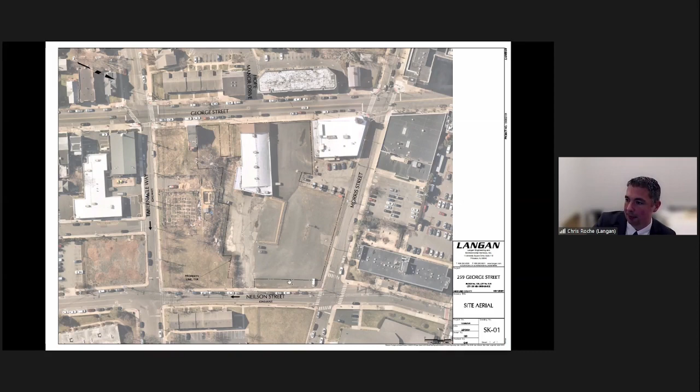So what the applicant is proposing to construct on the property is a 45-story mixed-use building, which will contain retail components, structured parking, as well as residential units above. The building will have a footprint of approximately 40,500 square feet. Within that, it will have approximately 25,000 square feet of retail, 501 parking stalls, and 800 residential units over top. As Mr. Kelso also alluded to, we will be constructing a 25-stall surface parking lot just to the north of the Abundant Life Church facility.

With the new development, our primary proposed site access point will be off of Neilson Street. That'll be a 24-foot wide drive. It'll provide access to the structured parking and will also provide access to our primary loading area. The architect will show you more detail about these spaces momentarily.

From an overall parking perspective, we'll be fully compliant with the redevelopment plan. Not only will we be providing the number of required parking stalls, we'll also be providing the required amount of electric vehicle parking stalls, as well as the required ADA parking stalls.

The loading, as I mentioned, will be primarily done off of our Neilson Street driveway. We're also proposing a small loading area on Morris Street where we anticipate smaller use loading vehicles, primarily to serve the retail spaces along Morris Street.

From a stormwater management perspective, we'll be fully compliant with the state stormwater management regulations by installing an underground detention system. Lastly, with the utilities, most of our utility services will be coming in off Neilson Street, with the exception of some of our water lines, which will be coming off George Street. The reason for that exception is because there is larger existing infrastructure within George Street.

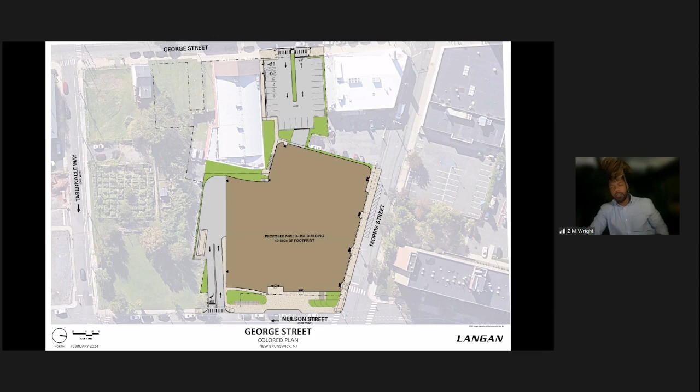The biggest thing we're doing, and it's a state requirement, not just us doing it, on all development projects, is we're increasing impervious coverage compared to existing conditions. You're required to install detention measures to reduce the peak flow significantly compared to existing conditions leaving your site. Without getting into too much technical detail, for the 2, 10, and 100-year storm events, we take what's running off the site now, and we're required to reduce that by 50, 25, and 20% for those storm events. So when this building is constructed, the peak flow leaving our site and going to the downstream systems will be significantly less than it is today.

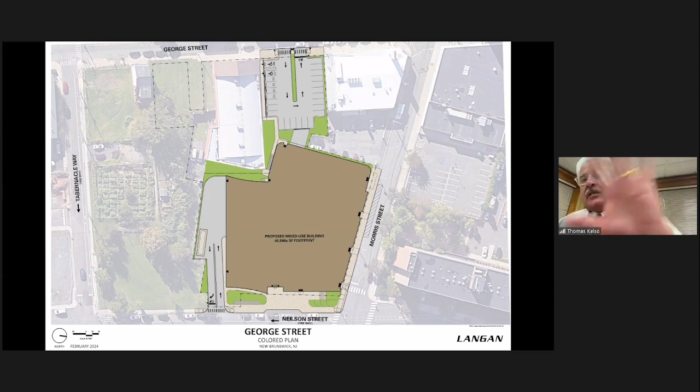I have a question. You have 80 units of affordable housing. Are they in one section or distributed all over? I'll answer it because it's a question with an expectation: the units are dispersed within the entire building. We can't just identify a location in the building and set them there. You wouldn't do that as a practical matter, but it's not permitted anyway. So they will be equally dispersed throughout the building.

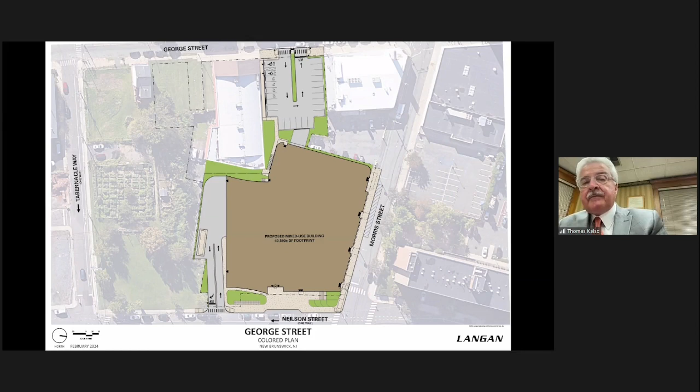On the site plan, there is a liquor store and a grocery. Is it part of the development? It is not part of the development. No.

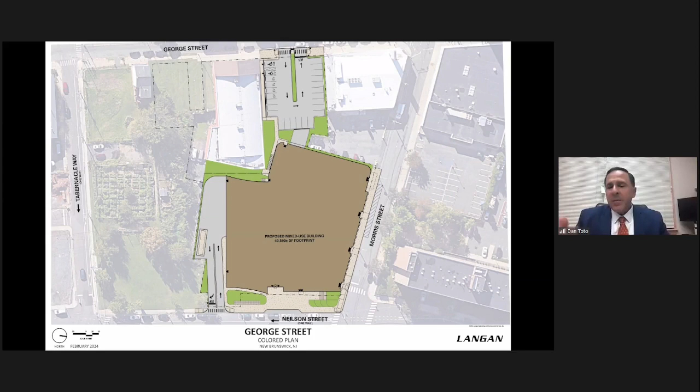All right, other questions? Chris, will you need to give me back as the host, and then I can give it to the architect. We've got nothing but PowerPoints tonight. This is amazing PowerPoint instruction. Fantastic, I'll pull it right up. Who's up next?

I would like to introduce the principal development client, Shimon Jacobowitz. I know he's on, he's hiding back there somewhere, but I just wanted to introduce him to say hello to you as a board. I know he was on screen before, I don't know where he is, but I just wanted to introduce him. And also George C. Wright Jr. from the Abundant Life Church, who's obviously a very interested spectator here tonight, to make sure you were aware that the church was also represented here.

They're here somewhere. Yes, Mr. Kelso, we see them. How are you? Mr. Seawright's a legend in his own right, so you're in good company there, Shimon. Tom, I'm here, yeah we see you. Okay, very good. Seawright, you want to say a few words?

You can, it's up to you, before we move over to the other PowerPoint presentation. No, we're very excited about this project, myself and my father. So we're very excited, thank you.

Great, and Mr. Shimon, we liked your project, or at least I did. I'm not a voting member, so I can tell you, in Brooklyn, that's pretty sharp. That was a pretty sharp building, and that's what we're looking forward to. Yeah, I checked you out, it was really nice, I like that.

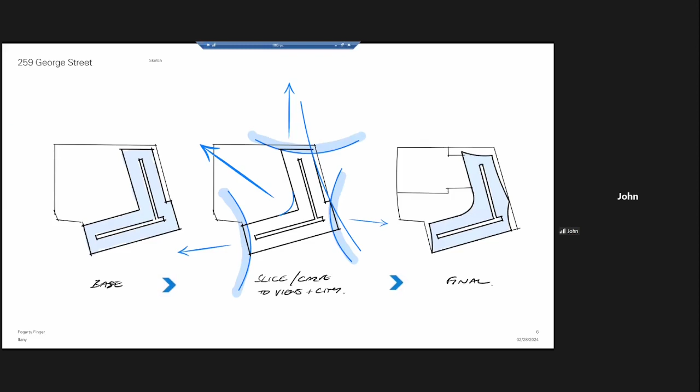From an architectural perspective, we based it on influences of the site, and there are many things that make the site exciting. I mentioned already its relationship to the already built up portions of downtown New Brunswick, and its kind of first or next link in the necklace, or whatever you want to call it, that leads you down to the Lower George area. The proximity to the river is quite lovely, and as we get up to the upper levels, it will allow some pretty fantastic views. You'll actually be able to see all of these skylines from the upper levels of the apartments, which is kind of fantastic.

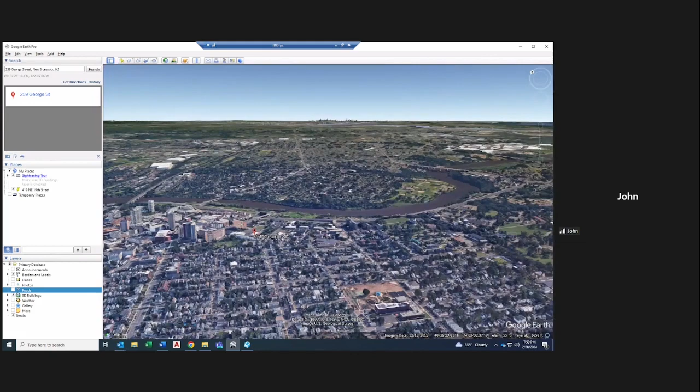So these are the influences on the site: the river, the views, the relationship to downtown. And that is kind of the driver of the basic geometry, basic massing, and orientation of the building. For much of its height, it is this L-shaped building. As somebody pointed out, we get up above a certain height and we step back and it becomes more of a simple slab, but it's predominantly this L shape.

The L is open to the existing part of downtown, and this is critical—what we see as a very important intersection of George and Morris—and the view of the building as you come down this way. But then also the views of the skylines in the distance, the views over the river, and taking the geometry of the river as an influence. We're on this bend in the river, and that softens the strict L shape of the tower, forming a kind of receiver or cup that welcomes downtown.

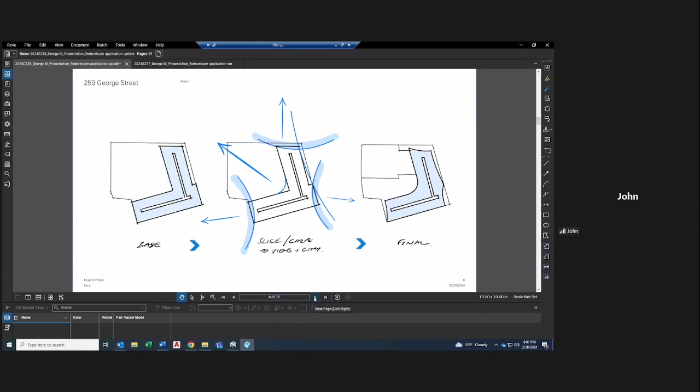And that leads directly to the basic footprint of the building. I'll get back and go deeper into the plans in a moment, but I just wanted to show you that the design didn't come from nowhere, that it has been considered and is responsive to the site and to the context, and that we are both aware of and participating in the larger urban goals of the redevelopment plan.

Let me just go back to—I cannot go back to full screen.

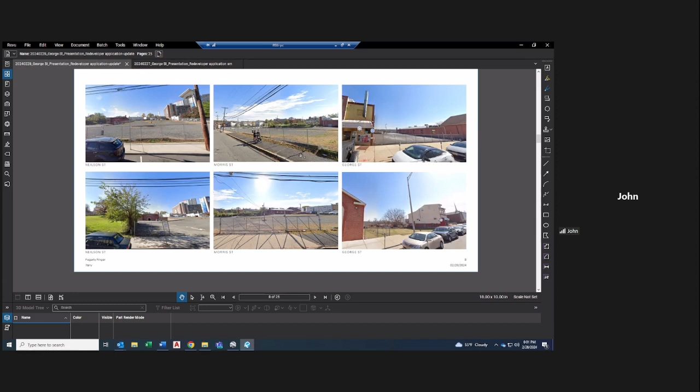You're well familiar with the site—you already listened to Chris's presentation. It is currently undeveloped; there's nothing to tear down to build the property, which is always a nice thing. Basic site plan you also got from Chris. I'm not going to dwell on it too much, but you see this L shape of the tower again. This is the church over here, and this is the grocery, the Bravo, on the corner of Morris and George.

I'll take a little time to go through the ground floor experience and the basics of the plan and how you access the building. Let me zoom in here a minute. So to orient you again, this is Morris on the right-hand side of the plan and Neilson on the bottom. The sloping site makes it a little difficult to understand the ground floor, because if you're high up on Morris Street, the same level that is at grade on Neilson is underground at the upper corner of Neilson. So you have to take the ground floor in two pieces.

The main residential building entrance is off of Neilson, and there's a pull-out proposed here. You can see the front door of the residential building and its lobby, and even further here. So if you're in an Uber or getting dropped off, you'd pull into this pull-out, or if you're a pedestrian coming from the train, you'd walk down the sidewalk and come in through this main lobby entrance, which gives you access to the main elevator cores of the building. There are a total of 5 passenger elevators, low rise and high rise.

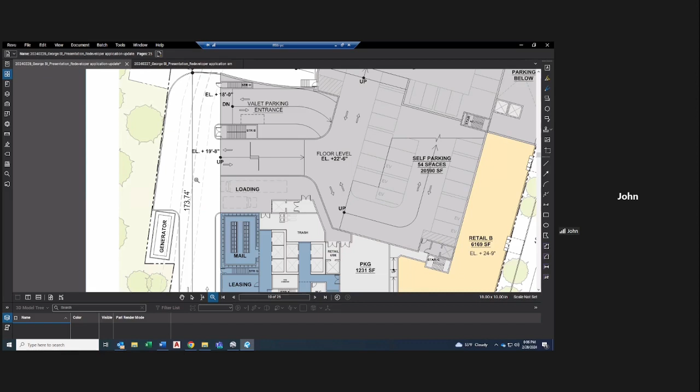So you go up two self-park levels, then down to a valet level for the parking.

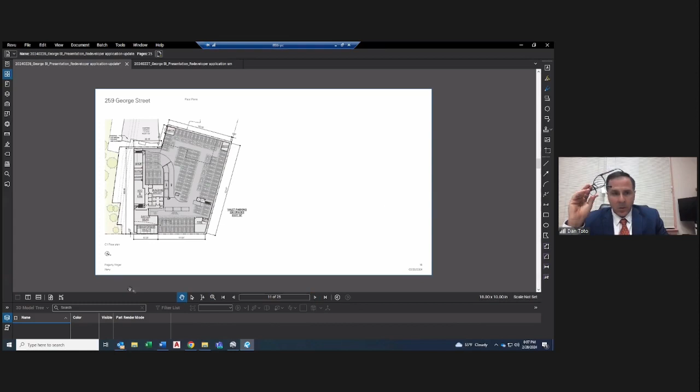I can just jump quickly to the cellar plan. Hopefully - there we go, oops. Let me see if I can get it back here. There we go, you're good. I wasn't lying when I said I was having tech problems - it's been doing that to me all night. So hopefully it doesn't happen again - you've done a good job so far, thank you.

I'm spending a lot of time on this plan. I don't mean to bore everyone, and I know I'm meant to be brief, but I think you want to know how the building works, so I apologize if I'm being too long-winded.

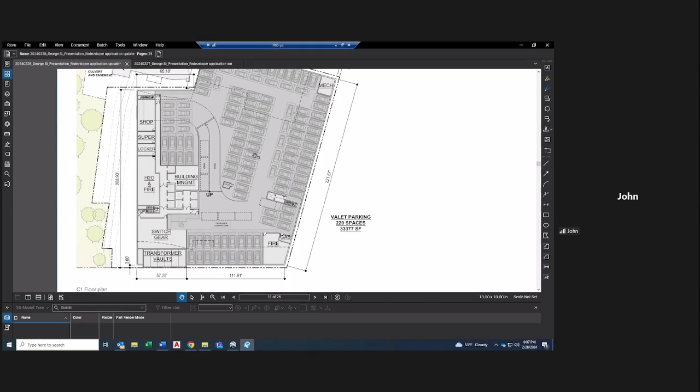I'll speed it up here. Valet parking comes down here - you drop off your car with a valet. You've got some parking stackers here, so a lot of - you can see 220 spaces in the valet operation.

Building services and building management, back of house operations, are down here on the cellar level. That detention tank that Chris was mentioning is on a sandwich level overhead of those back of house spaces. Again, with a sloping site, the entrance to the destination retail, here in the upper right-hand corner of the plan, is a full story above the entrance to the residential lobby. You come in here, and this is where their passenger elevators are to take you up to the destination retail on the 7th floor.

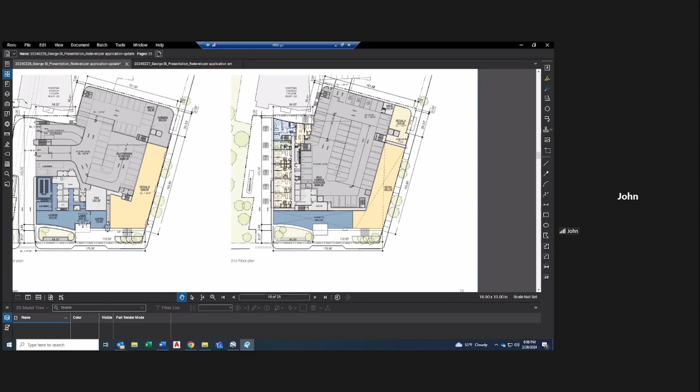This is also where the church parking lot is, a full story above the typical driveway entrance down here. So that temporary access or emergency access to the garage from the church is also up here on this upper level. Residential units start right away on the 2nd floor, but these are the high volumes of the double height spaces that you see on the rest of this plan.

Working our way up through the building, on 3 sides, the parking garage is lined with residential units. This is always a great thing. It means you're not just building a tower on top of an exposed 6-story parking garage. You actually see residential units, life, lights, and people moving around instead of just a parking garage. This is on both Neilson and Morris, two street frontages, so you get residential units there. We'll get into more detail on what those units are a bit later.

The 6th floor is currently proposed to be a combination of parking and some of our building amenity spaces. The building will have approximately 15,000 square feet of interior amenities. These will consist of lounges, fitness rooms, co-working spaces, kids' rooms, these kinds of things, located in various areas throughout the building.

When you get up to 7, you have this destination retail. This is showing a bowling concept. You would come in on your dedicated elevators up to the top floor, check in, and have this bowling alley - or we don't have a tenant locked in yet. Ownership doesn't have a tenant locked in yet, but some concept like this, with an activity space and then a restaurant space. They would be double height, with decent views going out over Morris Street.

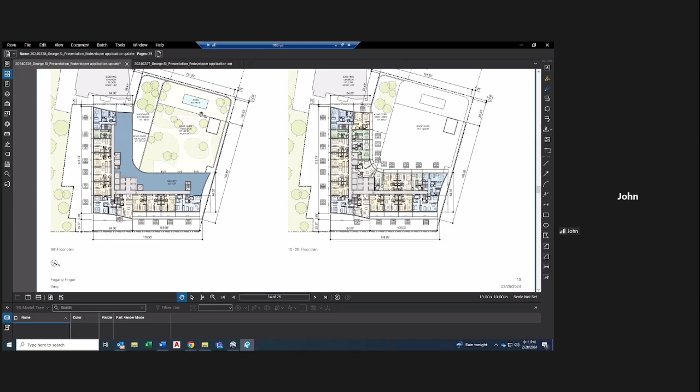This is the upper volume of those double height spaces. You get a larger suite of amenities up here on the 9th floor, and an expansive outdoor terrace - 16,000 square feet of outdoor roof space that would be amenitized. That might include sports areas, barbecue areas. There's a pool here at the end, with a deck and chaises around it. Active, fun space. Again, you're up at the 9th floor at this point, so with good views out.

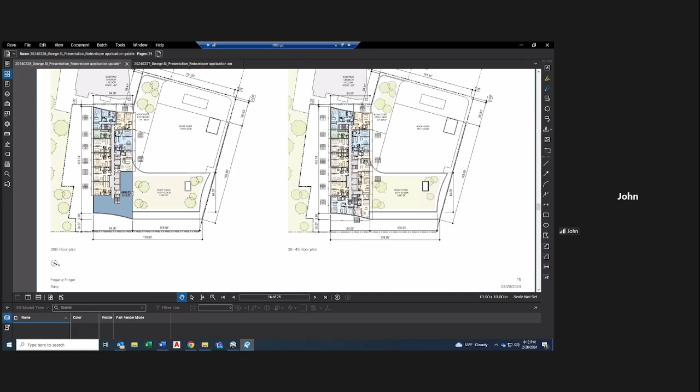Above this amenity floor, it becomes predominantly residential. You see this L-shaped plan again - the river is below us, picking up views of downtown New Brunswick. This important corner, as you saw from that sketch I showed earlier, has these softening curves sliced out of the building. The L-shape floor plan and low-rise elevators go up to the 34th floor. On 35, there's a smaller amenity suite and another outdoor terrace over the roof of that space, again with more residential units. Above that, it becomes a simple bar shape that goes up to the 45th floor.

Basic building section - again, everything is in compliance with the redevelopment plan: 45 stories, 450 feet, lot coverage, all aspects of building bulk are completely in compliance. There's a section through the lower part of that L-shaped tower, cut east-west looking south at the larger tower behind. This one on the left is cut north-south looking east, showing the full 45 stories of the tower. You see this amenity level with its walkout, the structured parking with its liner of residential spaces, and this destination retail space sitting on top of that structured parking.

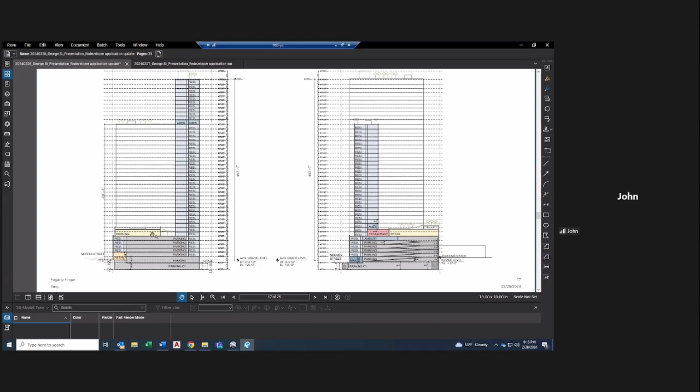Quality of the units is very important. As an office and personally, we are super dedicated to providing great living spaces for the people who will occupy our buildings.

There are many types of units - floor plans with curves and corners and many variations - but this is a representative sample. In New York, we do studios as small as 400 square feet or even less. These are over 500 square foot studios. Many of them have sleeping alcoves, even when they're studios, and even with closet space off of that sleeping alcove - this practically rates as a junior 1-bedroom, except the sleeping alcove isn't on the windows. 17 feet of frontage on the living area of the studio. It's fantastic.

The 1-bedroom has many walk-in closets. Not enough storage is a common complaint, right? So there's a walk-in closet, in-unit washers and dryers for every unit in the building, a peninsula kitchen, and room for a dining table because you've got enough depth here - it's not a squished unit where you can't fit a dining table. All aspects of the living units comply with accessibility laws, bathrooms, clearances at doors, everything else.

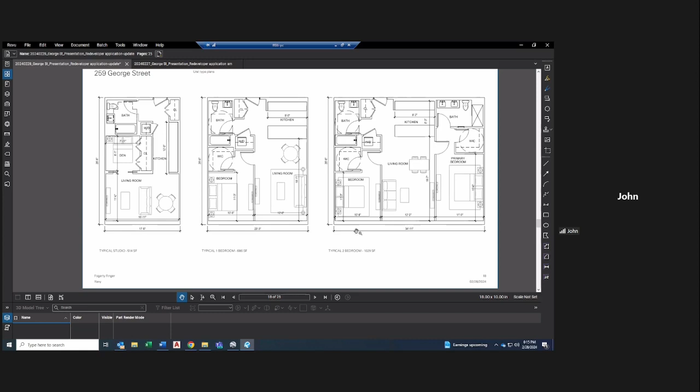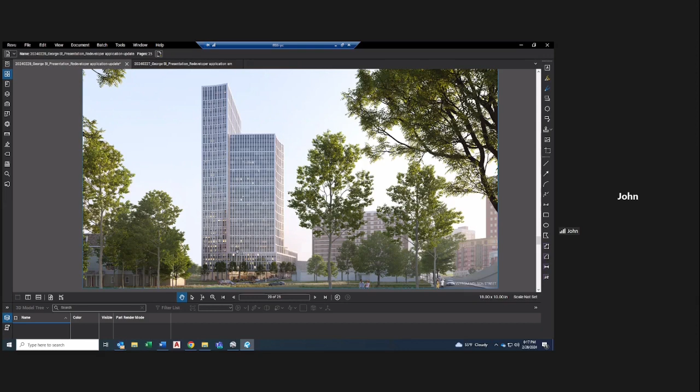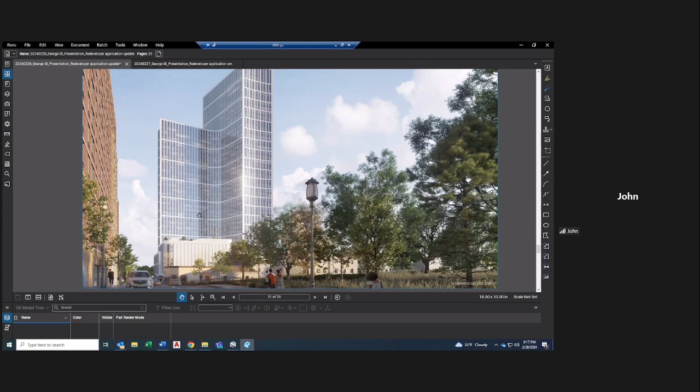View from George Street and Morris, that corner. You can see the Bravo grocery here in front of you, and the UAW building here on the left. And you can see this curving kind of catcher's mitt for the views and for the response to downtown.

The ground floor retail is very important. It helps to support pedestrian life and activity. There is a substantial amount of ground floor retail here. It is tall. It's extensively glazed and transparent. We want to see this as a wonderful active streetscape. People going in and out of what might be restaurants or clothing stores or whatever they might be, whatever tenants end up taking the space.

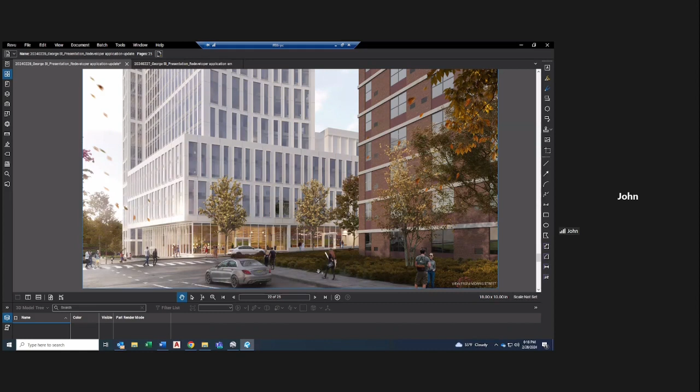But it's meant to be between these street level retail opportunities and the destination retail up on the 7th floor, just a really vital and energetic addition to the life of New Brunswick.

So this is looking kind of across Neilson. You see the residential building entrance here under this prominent canopy that helps to mark that entrance. The pull off on Neilson here, you come in through these double doors. Retail on here, we kind of hope this is a coffee shop that actually goes with the building lobby. It's always a nice adjacency to have. You pass in and out. Almost done.

This would be a building lounge on the left. There's a lot of interior design development that has to happen. This is a preliminary rendering, but it would be an attractive, warm space. You'd see residents of the building hanging out there.

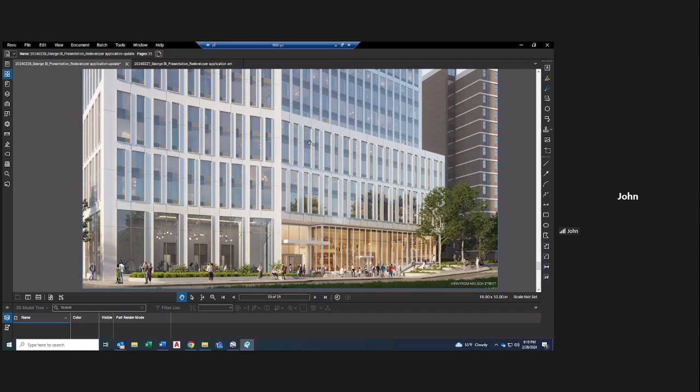And everything that you're seeing from here again is not parking garage. It's residential units. These would have apartments behind these windows, not ventilation for the garage. And that's it. That's the overall of the building.

Any questions, I guess. Did a great job, John. Thank you. Fantastic presentation. Chairman, go ahead. Sorry, no, it's a fantastic presentation, John. It's a beautiful looking building. That's all I wanted to say.

And Dan, let's turn it over to questions. Absolutely, the chair was gracious enough to open it up to the public. And we're going to do that. So I first have a question before the public. Oh, okay, sorry, yeah, take care of it. Yeah, I have like 3 questions.

Is Abundant Life, are they partners or part owners? Well, I'm not sure what the distinction is. Are they owners? Yeah, they are partners, and in a partnership of ownership, because they currently own the land, so they have a partnership interest in the entity.

Correct. Okay, are they involved during the rental period? Are they involved in recruiting clients, especially for the affordable units? I don't know the answer to that, but I'm sure that they will have a major role to play, particularly with identifying the affordable units and helping out with the advertisement for that. But, okay.